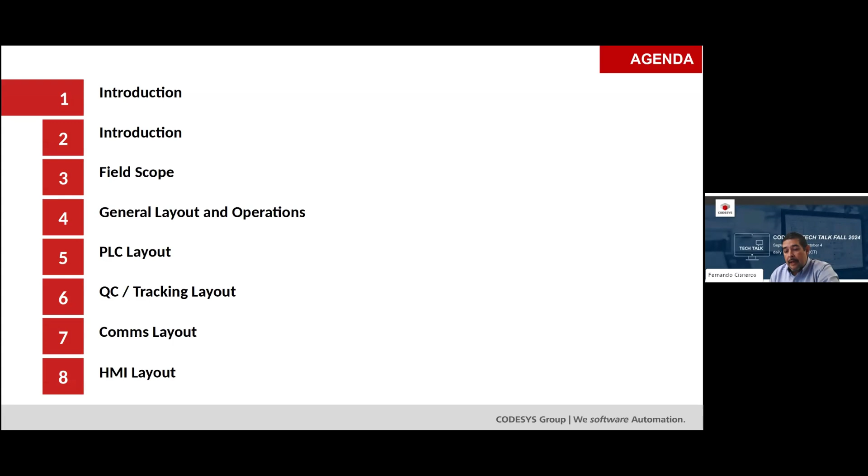Right now, we're going to do a brief introduction of ourselves, myself and Marthos, as the company NOA. We'll let you know how we did a system for a customer in the broad spectrum, and we will be happy to receive any feedback, any questions, or any comments that you want to do on the QA sessions.

Fernando Cisneros, myself. I've been in automation over 30 years, mostly in robotic automation and mostly in difficult processes for robotics, welding, painting, a lot of material handling as well. But I've been around automation and around industry for 30 plus years now. I have a bachelor in electrical engineering in 1993 from ITESM in Mexico. And I've been overall automation responsible for several lines and several integrations starting in the year 2000.

With me is Marthos Angulo. I'm going to introduce him right now. There he is. Marthos is a mechatronics engineer. He has a master in science in optomechatronics, and he is the main developer on the system that we're going to talk about here. That's why I invited him as co-host, so he can explain a little bit on the technical details on what we did, how we did it, and also make the presentation clear for you in that sense as well.

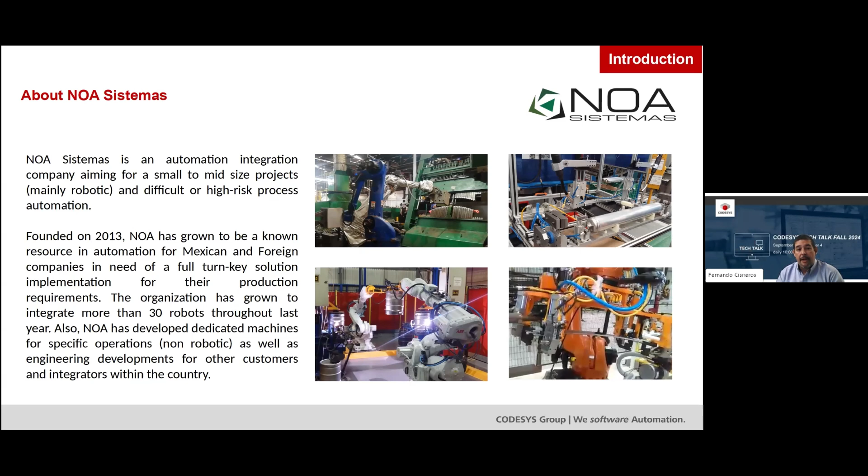We founded NOA in 2013, and we have been working with several companies in Mexico, both Mexican corporations and external corporates from the US, from England, from Germany, from France. Last year we did systems adding about 30 robots and about 3 or 4 dedicated machines. Here are some pictures of some items that we have done in the past, and that is our core business, basically high-risk processes, full automation, and turnkey systems.

Why did NOA go to CODESYS? We were doing all the traditional PLC automation for a number of years. We did all the traditional controls for a number of years. And when we were exposed to CODESYS, we looked at the opportunity to put the CODESYS framework in service for our customers. Basically, getting the CODESYS tool set, getting the ever-changing requirements from our customers, and getting all the benefits of the CODESYS system working for our customers.

Right now, CODESYS is the stable tool set that we use and promote with our customers on every project. And we also service customers that have more traditional and standardized PLC or control structures. We can do that, but we have been using CODESYS as a great tool for us and for our customers. And the scaling of it has been a great value for many of our customers that have now embedded CODESYS into their lives.

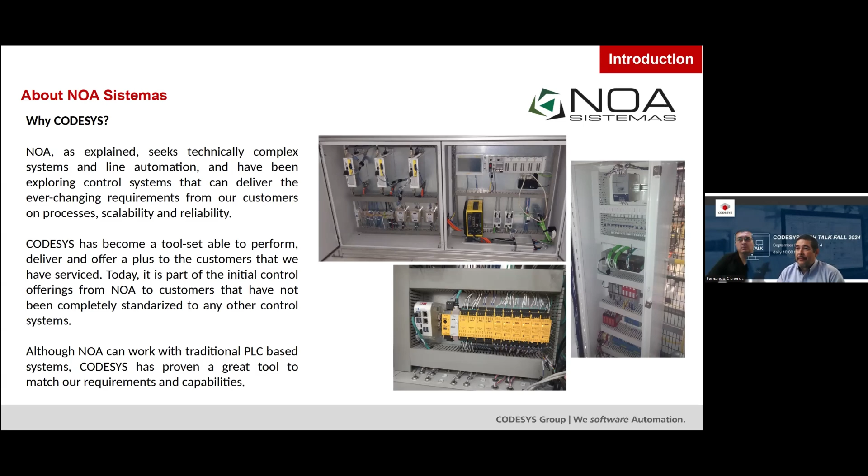Today's talk is a project that we built for a customer here in Mexico. It's an automotive assembly, a safety part for pickup trucks. So you can see there is a high pressure container for brakes and suspension on pickup trucks. The assemblies and sub-assemblies, these are the requirements that we had from our customer.

Assemblies and sub-assemblies needed to be quality verified before and after any operation, meaning that we need to make sure that we have good parts and good sub-assemblies into the operation, and then good parts and sub-assemblies out of the operation, plus real-time database tracking on a customer server, and real-time measurement as well on all the individual parts and sub-assemblies.

NOA implemented this system with 19 robots. These are ABB robots per customer preference. And these robots control the production of the assemblies, with 7 operators feeding individual small parts to the system for a total of 17 individual parts assembled in several operations to conform the full assembly.

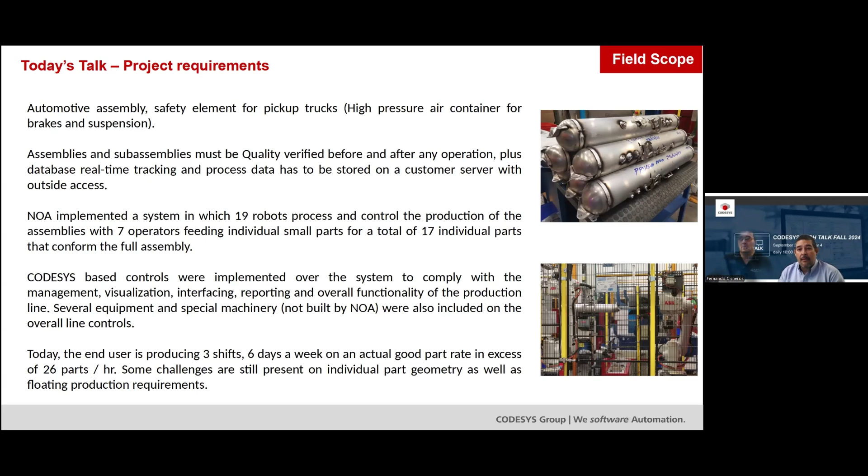So this is what we needed to solve in the field. This is the line that we needed to set up for our customer. How did we do this? This is a general layout of the system in which we show the operations being done on the line, starting with operation 40 all the way up through operation 130.

The operators interact with the system in operation 40, setting up the first part, 50, 60, 70, 90, and 100. All the operations are transferred in and out with robots and verified for quality control, for measurements with robots with no human interaction whatsoever. This line starts in operation 40, and operation 130 picks up a pallet full of good parts with a database tracking data on each one of them.

And all the data from the processes that were done on every operation are also stored in the database. So every part coming out of the line has the full history of the line, of the processes, the parameters, and the times that it ran, with measurements on individual parts, on sub-assemblies, and full assembly.

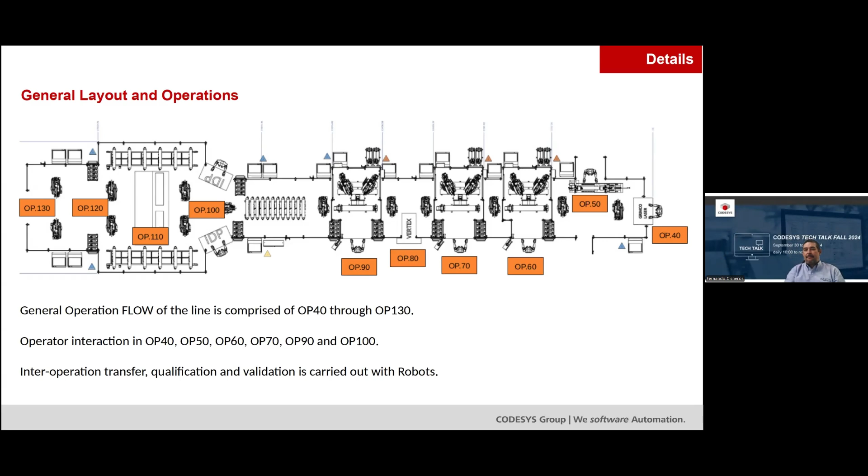So we're going to explain the PLC layout that we use to develop this project. In the first layer of the network, we use a CODESYS PLC from Berghof, and we use also the newest version of CODESYS available right now to develop this project. This main PLC is the one where the final user can choose if the complete line is working in automatic mode, manual mode, or semi-automatic mode. Also, this one has a direct connection with the user server to store all the data from the complete line production.

In the second layer of control, we have 3 CODESYS PLCs also. It's the same version as the main one, but those are the ones that control the welding process in the 3 cells for welding with robots. That would be the main process for welding machines, but also the main PLC and the second ones are able to control the movement of the parts in the line with pick and place, material handling.

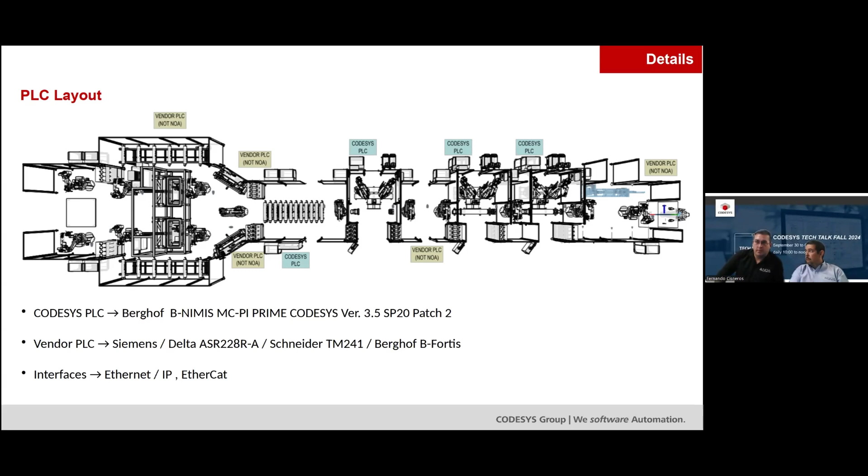Okay, about the quality control tracking layout, we have several devices available in this line. We have Wenglor laser profilers that share information with the main PLC by EtherNet/IP. These laser profilers give us the measurement of the part. So they fully measure the individual parts coming into the line, and at the end of the day, have a go, no-go signal as well to the main PLC.

Every piece that the user enters into the production line is trackable by several QR readers that you can see in the slide. And that also shares information with the main PLC and the welding PLCs by EtherNet/IP. Once we have the quality state of each part, that state is attached to a QR code, and that data is stored in the database of the user. We also have a Wenglor laser profiler mounted on a motion servo that is used for the same purpose.

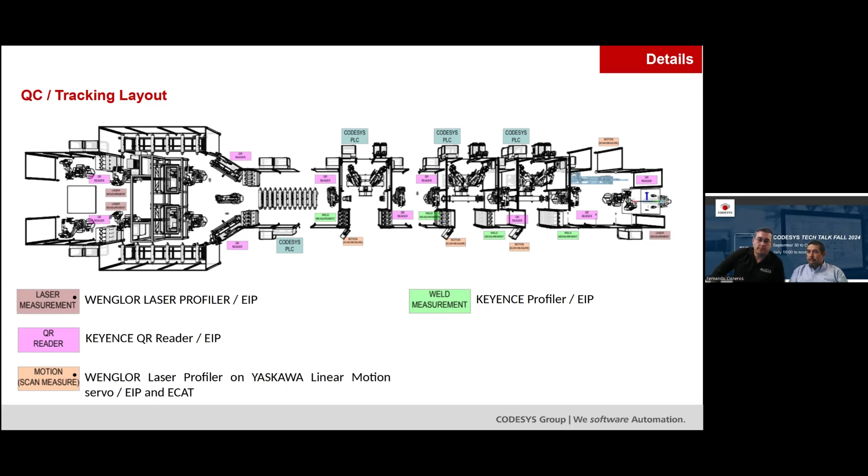Okay. Also, we had a lot of robots, like 13 robots available in this project, used specifically to move the pieces between one operation and another. Also, on those robots are mounted some kind of cameras to do the quality control previously described in this presentation. All robots communicate by EtherNet/IP to the CODESYS PLC, but also those robots have mounted on their structure other devices like pneumatic manifolds or I/O modules and cameras, as I said before.

Here, a quick note on the communications. With the communications, we were able to blend in all the PLCs from the vendors and collect all the data that needed to go on the database on the line with the main CODESYS system going into line. So this is something that we couldn't have done with a branded PLC and without like 25 different licenses to get it going. So that was a very good advantage that we could set up for our customer going forward.

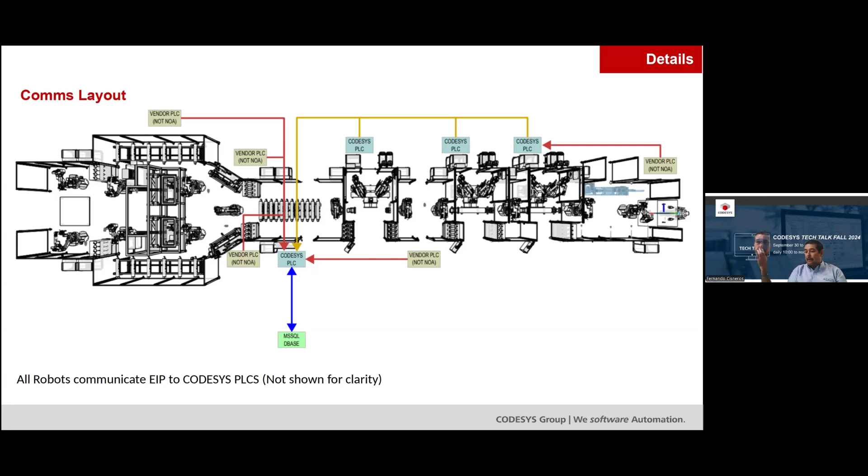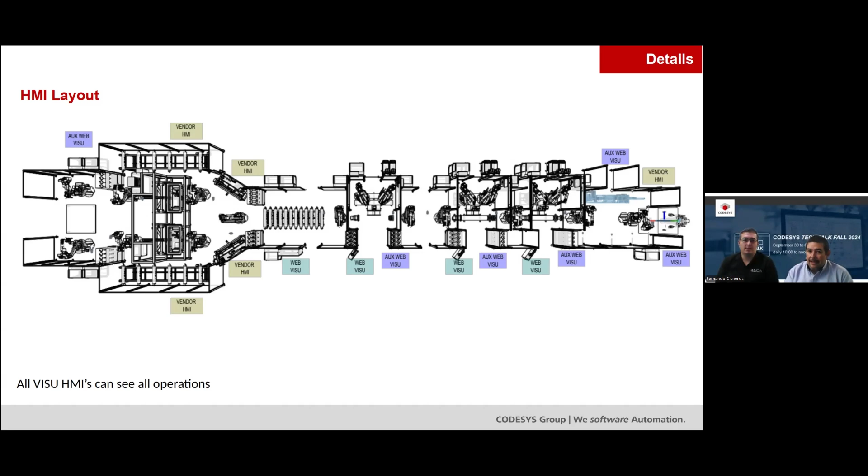Next, Marcos, I will let you explain a little bit on the resources here and the screens.

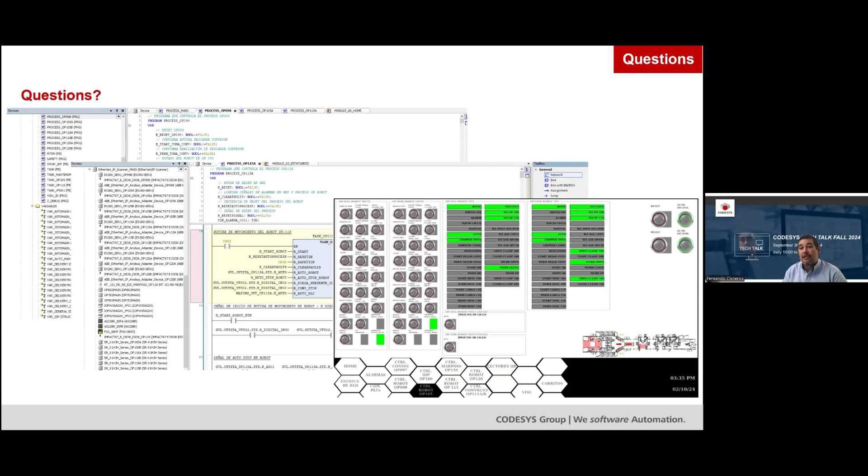That's basically our presentation for today. This is just a scratch on this field application. I'm guessing